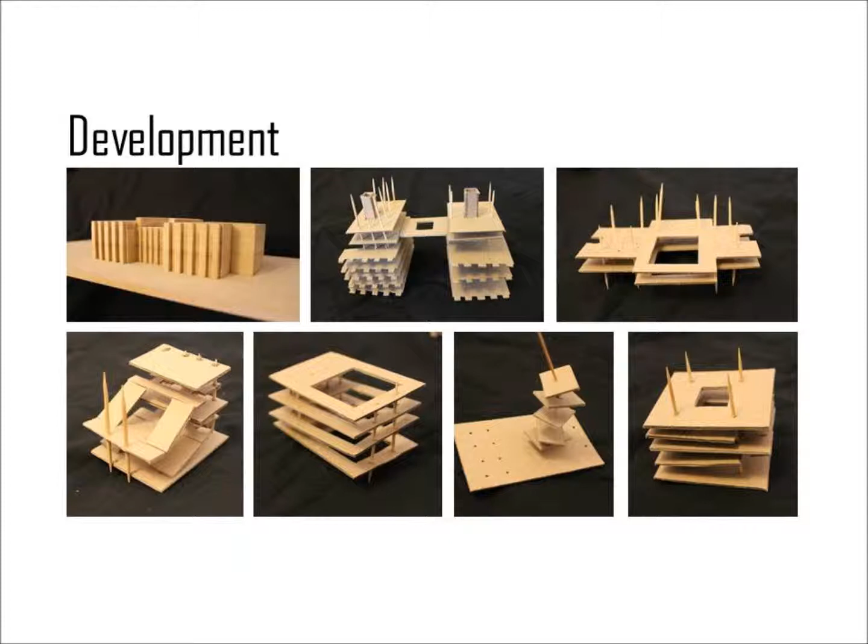I then wanted to model block models within the library itself. I started off just by modelling the library, then went on to look at several different ideas of how to extend upwards and how that would fit in with the appearance of the current library.

Now, during this project we looked at many different ways of creating libraries for the future. My key principle that I've decided to use was the 24-hour city. That is an idea based on trying to create enough services for people to not necessarily have to leave the library if they wanted to.

They could stay there and study for an entire day. I also wanted to include some more modern ideas of how people retain information and different ways in which they can do so.

Now, looking at the plans, I've started off by looking at the basement. Instead of coming into the building on a sort of half level, I've taken it down so that you come down and then into the building to try and improve the entrance for the space.

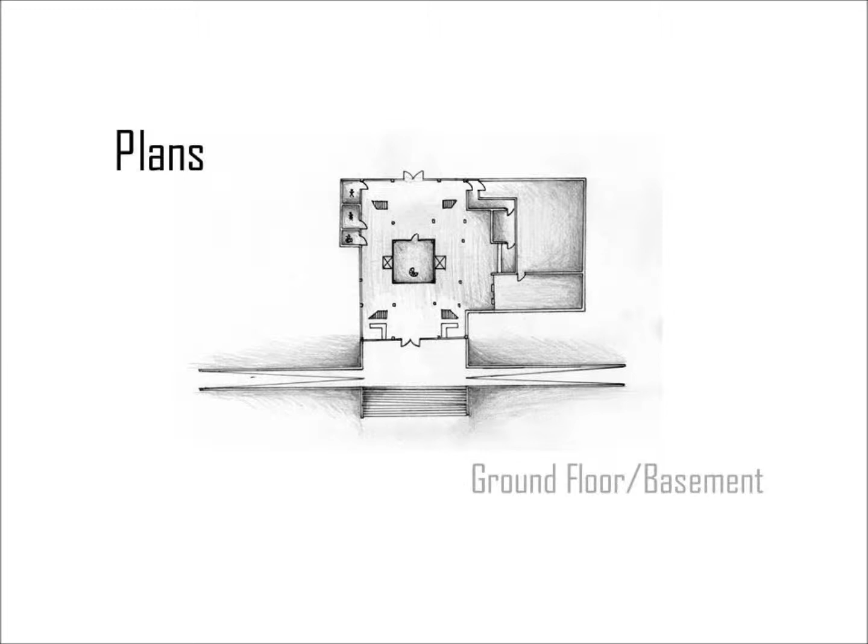Due to the fact that the floors in my building get smaller as you go up, this creates an atrium, so you should come into the front and back doors into a light, airy and very tall space. The back way is also improved massively by the fact that you do come in and it feels like an entrance rather than coming into a back door.

Now you've got an archive space in the middle, which, like I said about the Yale University Library, is on display for everybody to see that we have an archive. I wanted to use the spaces around the archive as well for a gallery, because currently people don't really know where the gallery is, and I wanted to create it so that you have to walk past it.

There's also a small cafe area downstairs for things like sandwiches and teas and coffees, nothing too substantial, just small, so you can whiz in, grab yourself a coffee if you wanted and whiz out again, or just sit there with your friends.

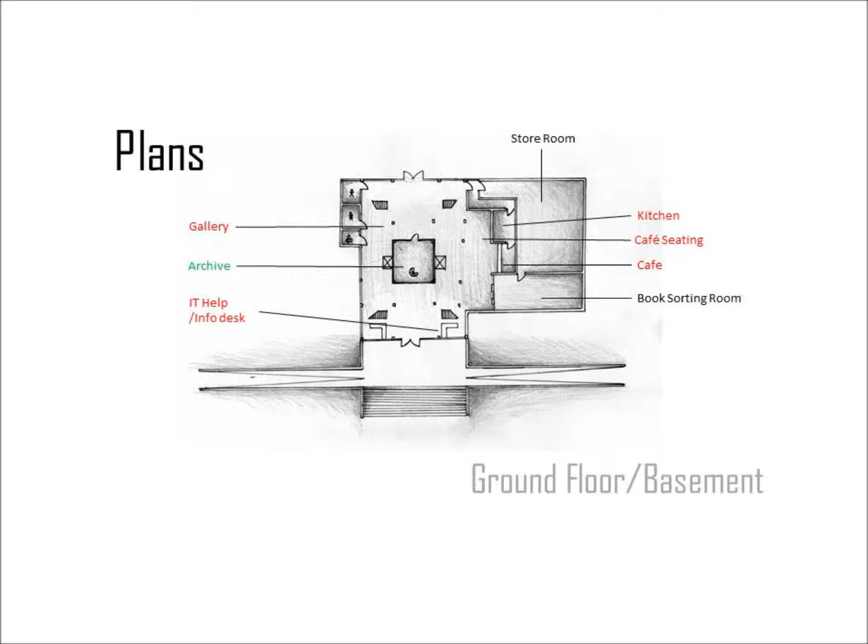If you enter the back door, you only have to go up one flight of stairs to walk into the lecture theatre. That reduces traffic for the rest of the building if, for example, people are just coming to a lecture and leaving again.

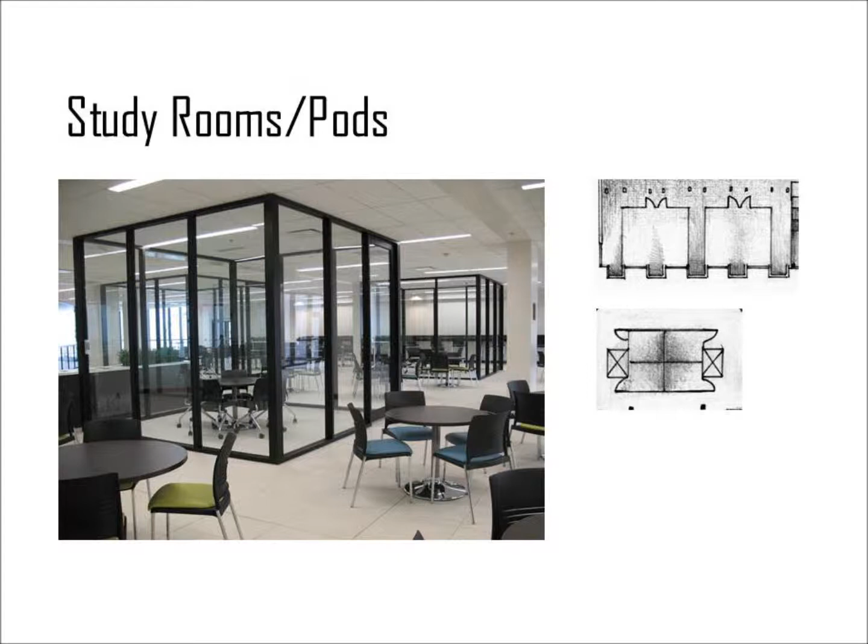You also see these closed off spaces around the outside, which are glass separated study spaces to allow people to study within the different noise zones without interruption from the previous noise zone into theirs. It creates another acoustic barrier from the outside to the inside of where you want to study.

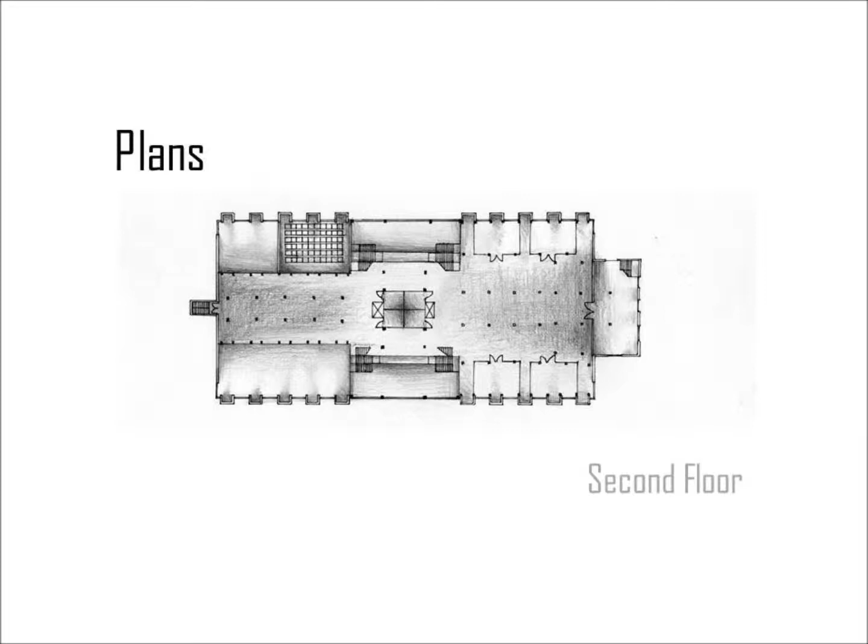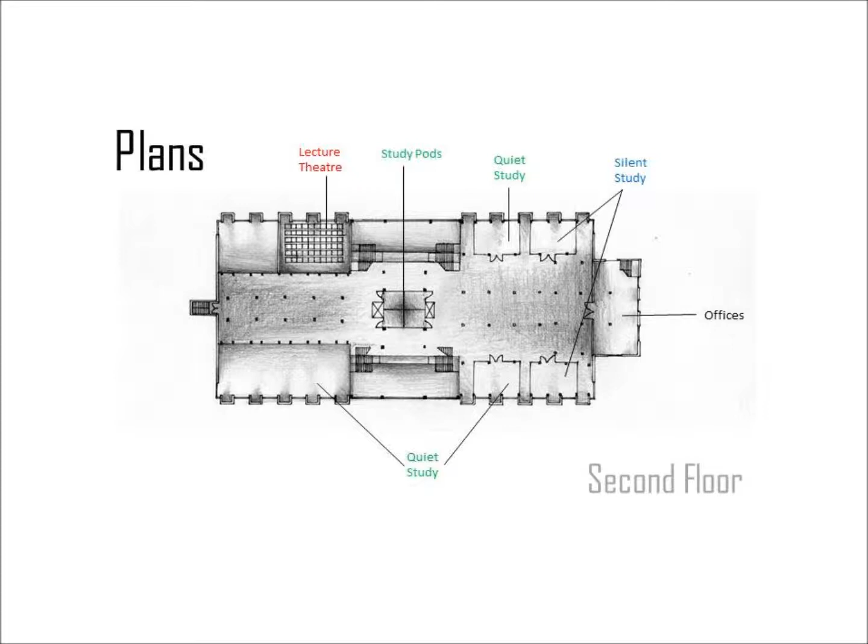Now if we go up another floor, you can see that the archive is no longer in the centre. Like I said, the archive is only 2 storeys, so then it's been replaced by the study pods, of which you've got 4 in the middle, which you could rent out from the library if you wanted to use them. And again, you've got your different study areas and offices to the right.

Now if you go up again, not much has changed, apart from the fact that I've introduced a video and audio library. Like I said before about the way that different people learn, I think it's important to incorporate different areas of what a library would be in the future into the current library design.

Now, people like to learn by listening to things. I urge you to listen to your music or rent or take away music with you, as well as videos, cartoons and anything else you wish to, but it will be a headphones only area, so it won't be music blaring around making lots of noise and interrupting other people.

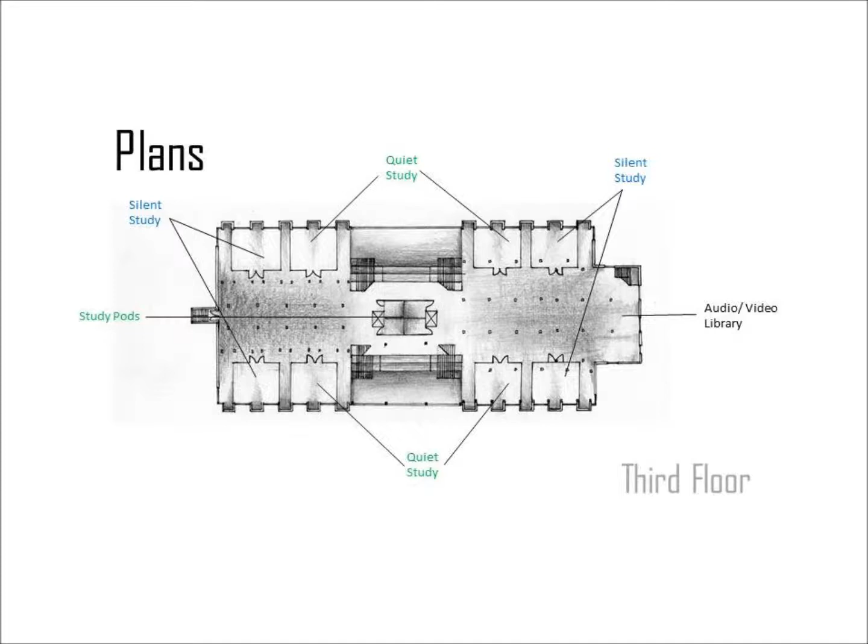So into the centre of the building, extra lighting will be required, not just natural lighting itself. Now I would suggest for these areas to use LED lighting, as fluorescent lighting tends to cause a lot of headaches and things with people, and also uses far more electricity than LED lighting.

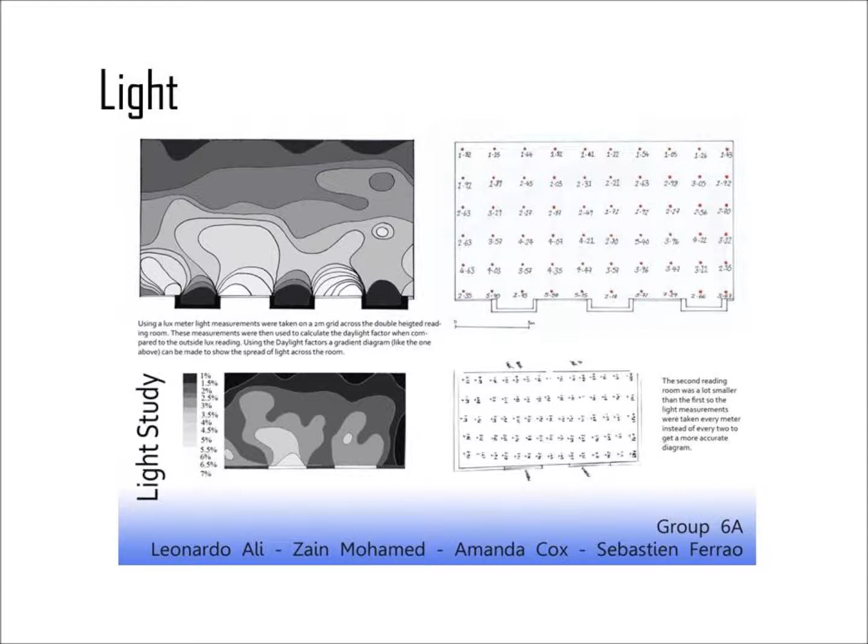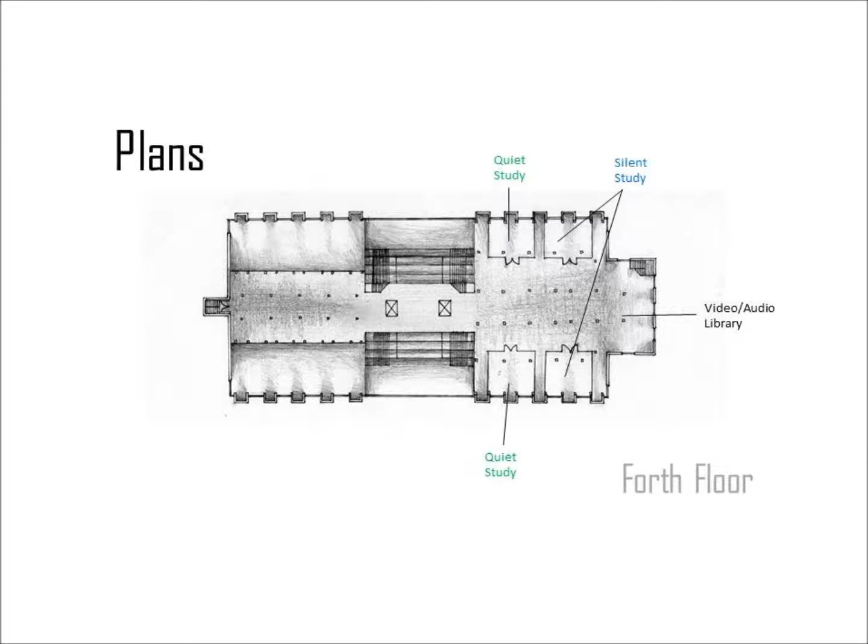Right, as we go up to the next floor, you can see again, very similar. There is a small internal staircase from one of the video library levels to another, just so that if somebody did want to see one thing that was just upstairs, they didn't have to walk all the way to the middle to go upstairs to see it again. This just continues from the internal staircase that was in the offices.

Now if you go up to the floor above, which is the additional one that I've added, you'll see quite a few changes. I've incorporated a gym within this section, which some people might think to be slightly strange. But I've seen lots of people whilst I've been going to the gym, reading books whilst they're on different machines, which I think is a fantastic way of combining exercise and learning.

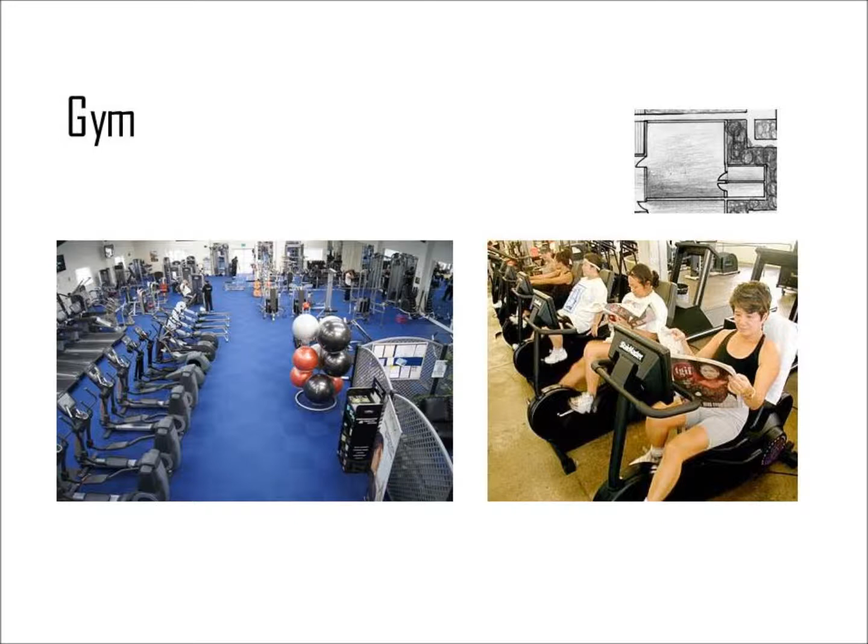Also, if you're downstairs and you've been sat on the same chair for, I don't know, a couple of hours reading your book, then you may want to go upstairs, use a treadmill, stretch your legs for a bit, then go back down and carry on studying.

Like I said before, it's incorporating the extra services that allows people to stay within the building without having to go out, do something else and then come back again, potentially losing their spot that they've been studying at all day. I've also incorporated showers, so if you did have quite an intense workout, you can shower and then leave again.

Now next door to that is a small cinema screen, or a very small additional lecture theatre if needs be, but this is for screening the cartoons in the archive and for special events. It's not to compete with the Gulbenkian, but say if you had a small group in the same way that you did in a study pod, you could rent out the screening area to watch something, say for film study students or something like that.

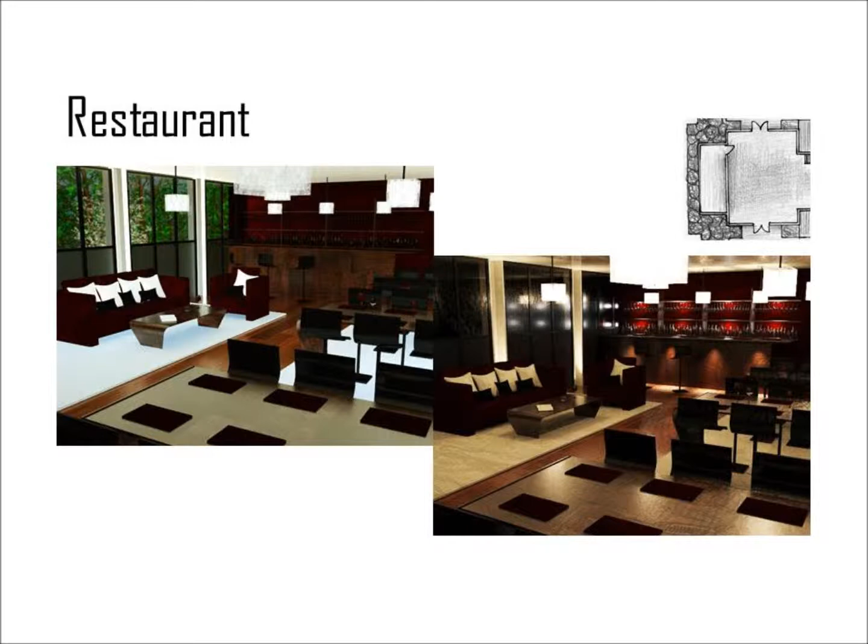There's also a restaurant which will serve far more complicated meals than the cafe downstairs, so you won't have to leave the library to eat dinner. You can stay within the building and have your main meal. There's also outside terraces and outside study spaces. This is to incorporate the fantastic view that you'll have from the top of the library, and also create a nice place for people to study, not only inside in a stuffy room, but they can also go and study outside on the roof of the library without actually leaving the building.

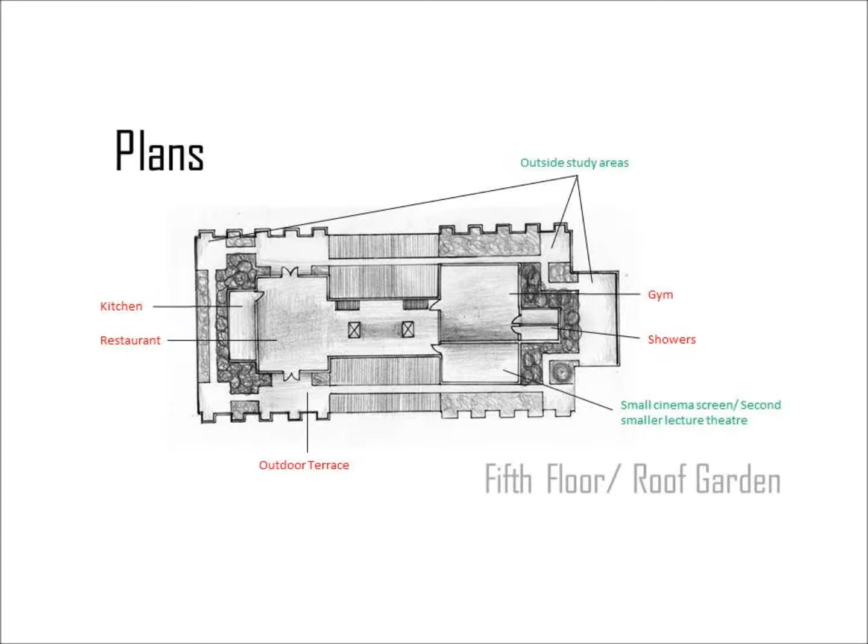Now if you look at some of the details that I've put in, I've shown how I've incorporated the different planting within the roof. You can see that there's different raised beds and everything on there. And that is a rough sort of layout to what I'd imagine the landscaping on the roof to look like.

There's also a roof detail there which incorporates the beams required to raise the building, as well as the planting levels that will be needed to landscape the roof.

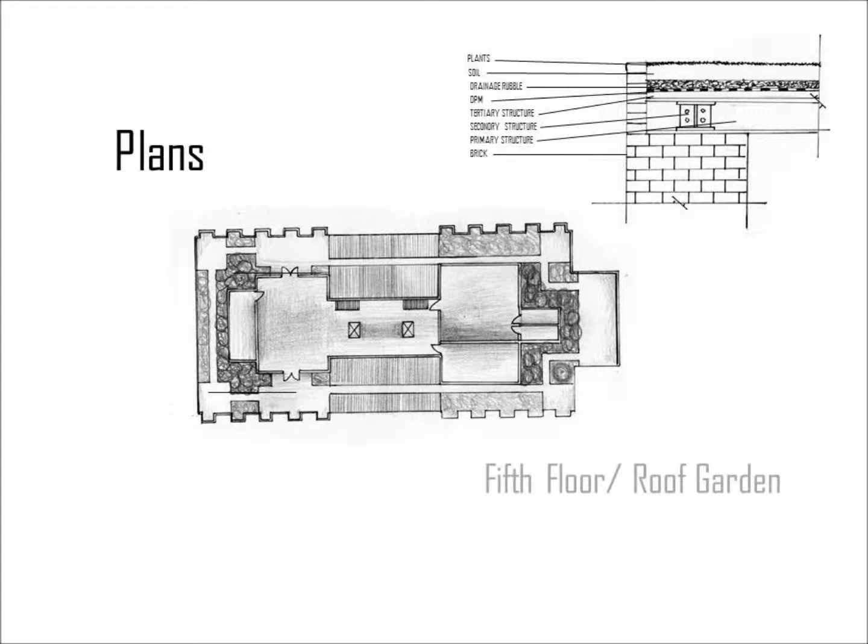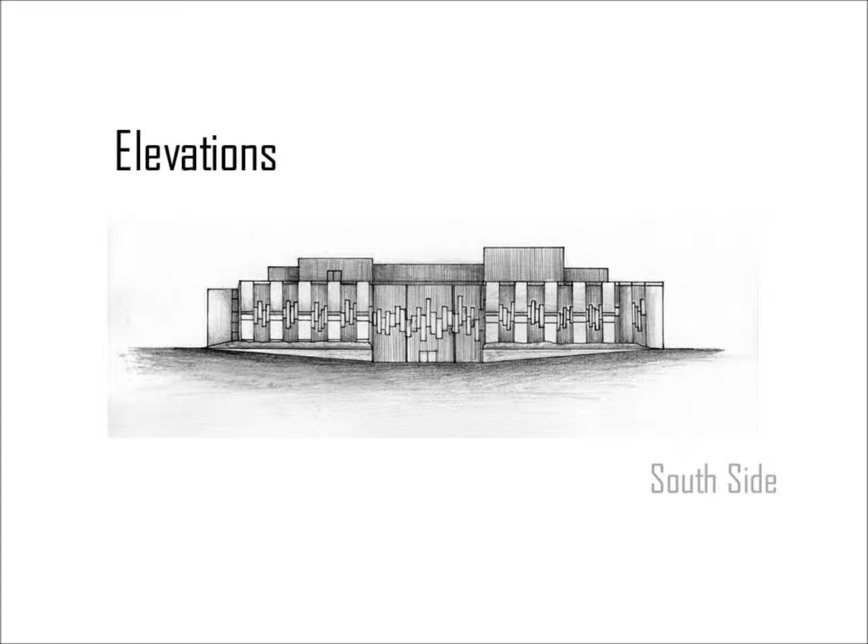You can see by the elevations how the extension itself fits in, as well as how the middle section looks within the contrast of the rest of the building, and these different areas of squared clear glass that are surrounded by insulated glass.

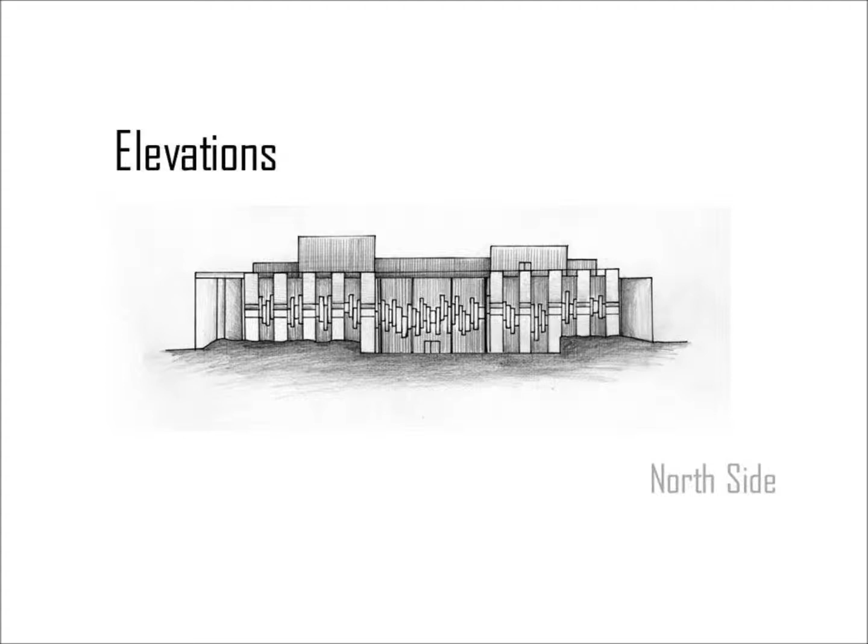Now this is seen a bit closer later, but I wanted to use insulated glass because it doesn't allow you to see straight out onto the outside, so you can't get distracted so much by what's going on outside, but it gives you this glow of light. It doesn't really reduce the amount of light that you get on the inside of the building, and also it's better for the environment because it is insulated. And the clear glass areas will be those cut out shapes as you can see on the elevations.

Now, the next section I've included because I was trying to get my head around the structure of the building itself and how I'd have to alter it to add it on the top. You can also see the staircases through the middle, which is how the circulation's been improved. You've got two very substantial staircases.

You can also see by the blue section that's highlighted the extra ½ metre that I've had to add onto the top for beams, which allow me to carry the extra weight that's on the roof. Now, you can't just build on a current roof, so I've had to incorporate those extra beams, which you can see on the next slide.

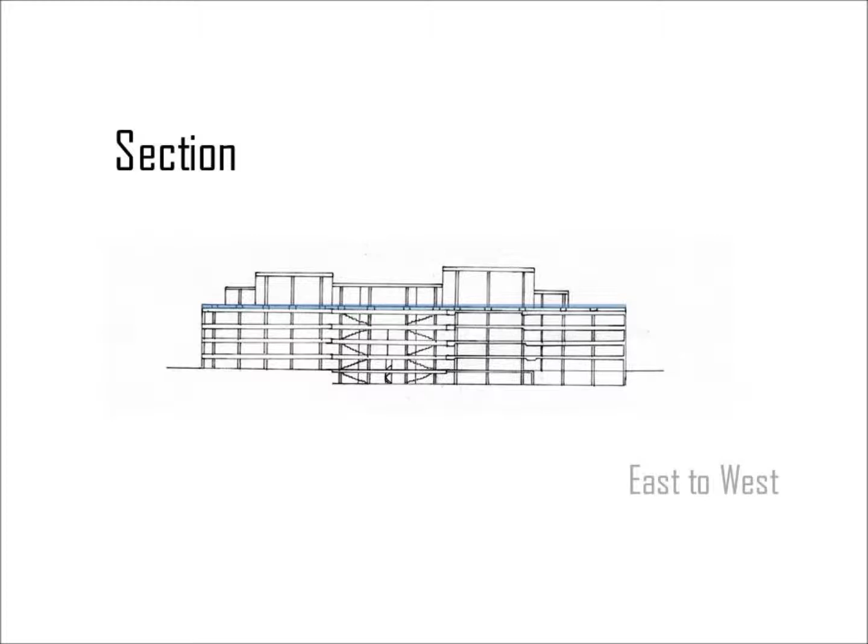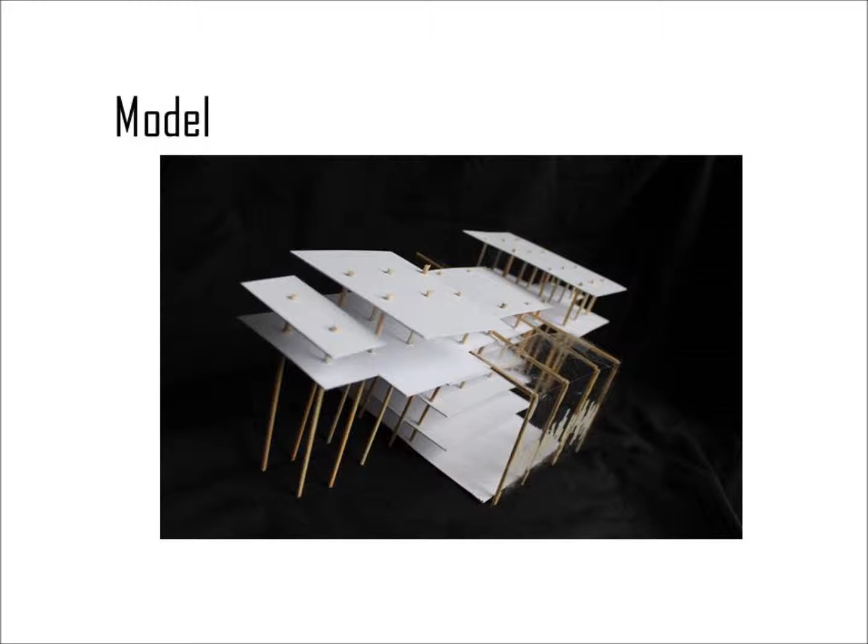Now, for the columns that are placed within the central sections of the extension itself, I've followed those columns up from the previous floors. Those columns are clearly within the model itself, so you can see exactly how the weight transfers from the top section all the way down through the columns.

Now the next section is straight through the middle of the new middle of the library itself, which is the new design that I've put in. You can see the concrete shape for the floor level is smaller at the two ends and gets larger in the middle with the two beams.

Now I've done this because it not only allows the floor level to look thinner from the outside, it also allows me to use those cantilevers on the outside without having to put structural beams on the outside. You can also see from this section how the air flows through.

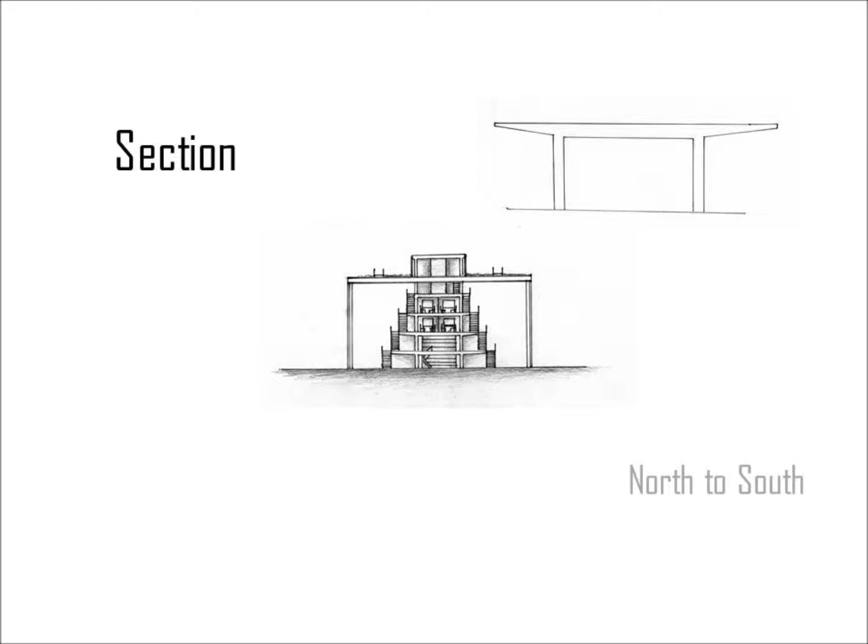Now I've incorporated shutters towards the base of the building, so the air can flow through the base and up the atrium and out the top again. The cold air will come through the bottom, will warm up as it rises up through the building, and then out the top through more shutters again. And this will create a natural ventilation system for the centre of the building.

Now if you look to the next slide, there are some details in which you can see these shutters that I've just described, as well as the insulated glass, the structural beam across the top, as well as the additional columns required to hold up these structural beams on the outside, the way that the clear glass intersects with the insulated glass, and you can also see the extension.

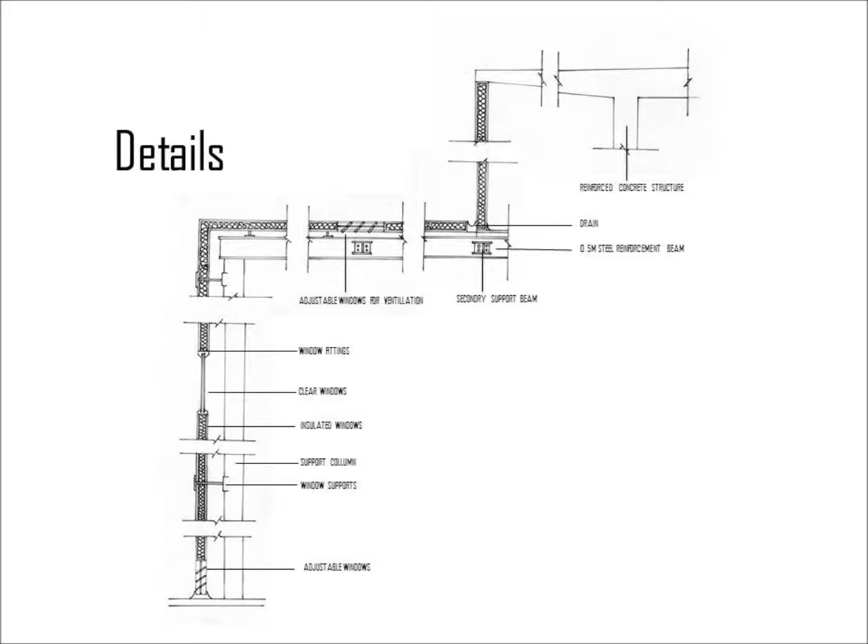Now, as for ventilation for the rest of the building, I'd like to incorporate earth tubes. These are tubes that go deep into the ground and draw air from the outside, cooled down by the ground that the tubes are travelling through, and then up into the building.

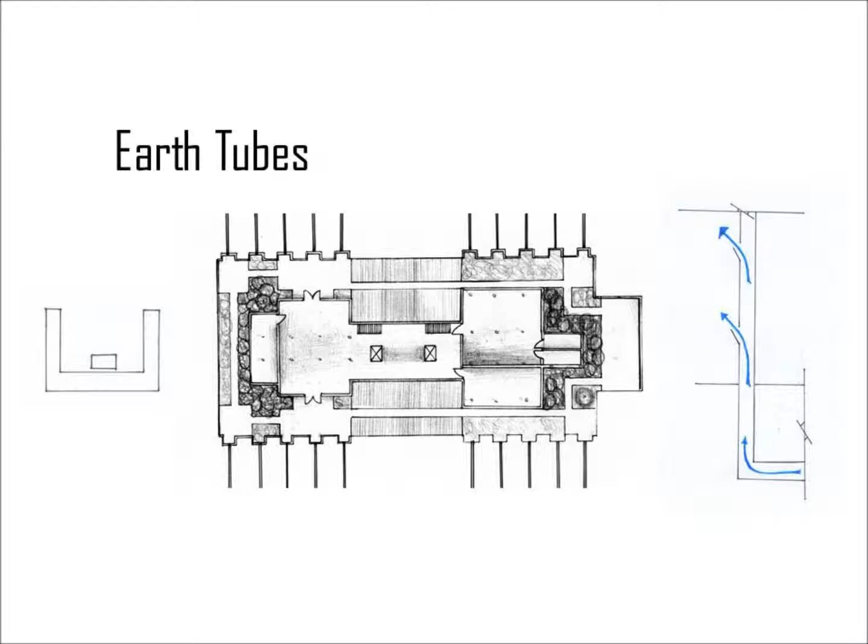Now, as you can see, I'd like to locate them within the C-shape beams around the outside, and then go up through the building, allowing cold air to escape at different levels, as you can see by the diagram to the right. An example of this would be in the lecture theatre, as you can see on the next slide, and this is how it would be used in practice.